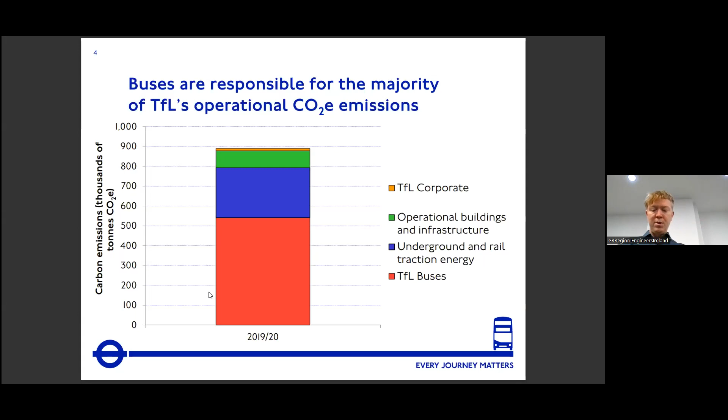This is a chart that a colleague of mine pulled together that I find really useful for answering one of those questions I used to always get at conferences when presenting about us going to electric buses. People would say, oh, you'll use more CO2 in the production, making those vehicles and batteries, so it's a waste of time - you might save CO2 when you're driving, but you will create more CO2. The thing is, the buses last, for us at least, 14 years, and then they have a life after that - they don't go to the scrapyard after 14 years. In the last 14 years in London, we will do one battery change during that time, which we've put into these figures.

So yes, battery electric buses have more embodied CO2 because of the energy-heavy manufacturing and sourcing of precious metals for the batteries. But the operational life of that vehicle is 14 years in London, 60,000 kilometers a year, and some buses will do 1 million kilometers. There's such a saving per kilometer in CO2 that it makes really good sense for us, even if the disposal impact is higher.

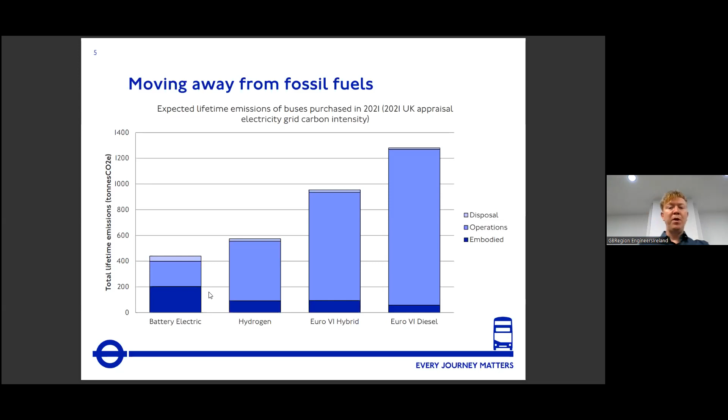And you can see it's the same for the diesel electric hybrids, not quite as good, but better. Hydrogen is something we're keeping a close eye on. It is more energy intensive to make hydrogen, but there are going to be much lower CO2 versions of hydrogen coming out soon. So those figures are based on the fuels currently available, but in future that may well be better.

So what we've done so far - each of these would have been a huge presentation themselves, but for the Euro 6 retrofit and for the hybrids, I'll just do one introduction slide and then focus on zero emission. The entire bus fleet was brought up to the Euro 6 emission standard for PM and NOx for air quality reasons. Only hybrid buses have been purchased - I think the mayor officially said 2015, but in reality, since around 2012, all the double decks we've been buying have been diesel electric hybrids. And then as of 2020, we've only been buying zero emission buses. So that's what we're doing now.

In a way, we've been buying the easier zero emission buses first, the ones that do shorter routes, etc. Soon every route in London will have to go zero emission. This target of when the entire fleet should be zero emission has changed a few times and is likely to change again. The mayor initially said 2037, then brought that forward to 2034, which we're definitely on target to meet. But 2030 has always been spoken about if we get funding to do it. In that case, we'll have to move a lot quicker and potentially do other things like retrofit existing vehicles into battery electric.

So this is the SCR - like I said, this would normally be an entire presentation itself, but I'll just quickly go over it. London had a real issue with NOx emissions, and it was the worst when the UK was in the EU. London was the worst in Europe in terms of nitrogen dioxide emissions in the centre. When we tested the first Euro 6 bus in 2014, we could see it was an order of magnitude better than the Euro 4 and 5 buses before.

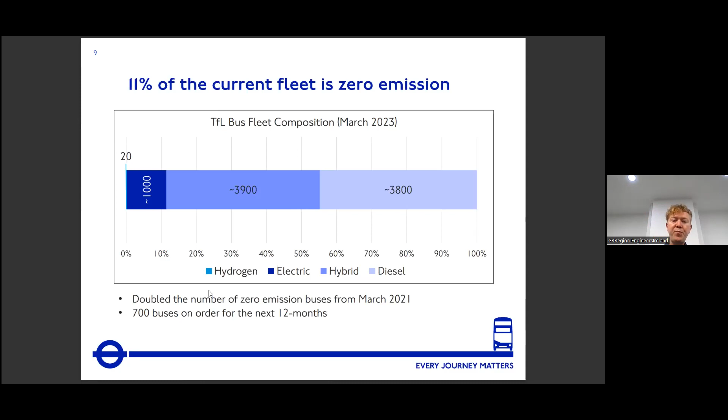Also the single deck buses were much cheaper, but the hybrid was an additional 100 grand anyway, so the cost benefit wasn't as good. So we kept those as standard diesels. But that proportion - all those diesel, electric hybrids and diesel vehicles - are now what we're transitioning to zero emission. And we've got another 700 zero emission buses on order in the next 12 months.

So this is the size of the challenge. I mentioned 8,700 buses - I think we started this before a lot of other cities, but when I go to Wrightbus in Ballymena, where a lot of our buses are made that end up in service in London, I see them all with, you know, TransLink and Dublin Bus etc. going down, because a lot of people have started later.

We don't have - in China, they charge it, a lot of them charge at 40 kilowatts, and they can charge for 10 hours or something like that. And that's nice slow charge, not too hard on the grid. They'll go out the next morning full, spend 8 to 10 hours out there, come back and then charge again. That's just not going to work in London. We need to do higher power charging.

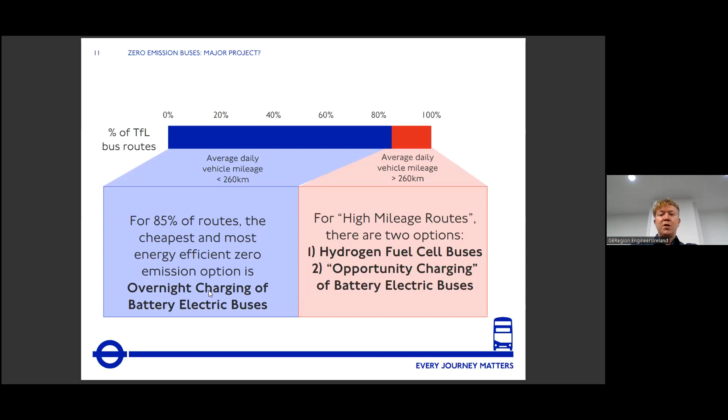But I'll come onto it a bit later. The cost of that infrastructure, getting it in London, is much higher than they predicted, and much more difficult to do. TfL probably aren't the cheapest for construction either, with all our standards etc. And certainly from our current pantograph project, we have a lot of additional requirements on the suppliers that drives the cost up, for safety and other good reasons. So we probably won't - I think that 15% McKinsey quoted will be closer to 5%, but I'll come onto that a bit later.

So here we are with our competing zero emission buses. The standard big battery bus is actually now cheaper than a hybrid bus, which is really surprising. The reason for that is the leasing companies now think this is the future. If we try to buy a new hybrid bus now - which we haven't done, but we sometimes get the prices for them - it would cost us more than buying a full electric bus, because they know the full electric bus will have another second life after the 7 years, or even have a second life going outside London with a new battery pack in it later. So that's very cost effective now - you'd think transitioning to full zero emission would cost loads more, but in actual fact the vehicles are now cheaper to lease.

The big downside with these is the range is limited. Currently that double deck bus you can see there has about 500 kilowatt hours of battery, but the packaging constraints in it are quite tight - even at the back of the bus, I would struggle sitting down in there. It's just constrained. Also in winter, our range is limited - you can spend as much energy heating the bus as you do moving it around. So that's a real issue. We've had buses not managing to service in the harsh periods during winter because of that. So definitely a downside to those.

Charge time you certainly need to take into consideration. A lot of the buses run for 24 hours, so you need to find a time where you can charge them. It's around - some of them down to 3 hours, some of them 5 hours - depends on the size of the battery, the voltage, and manufacturer of it. The range is around 200 kilometers, but it is getting better.

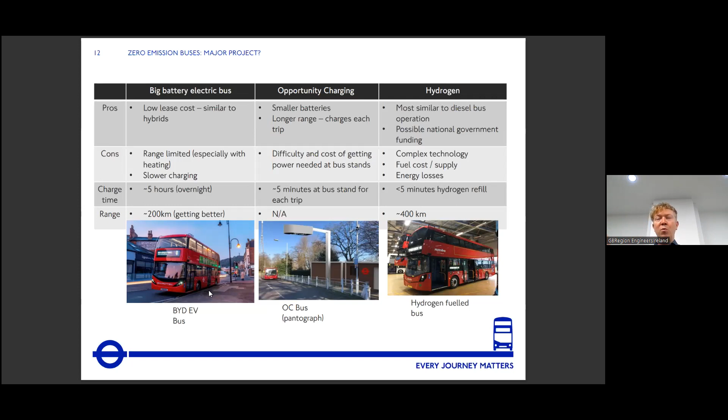So on current interventions, I'll spend a little time on this because we have a trial - I mentioned if we're forced to bring the zero emission deadline forward for all our buses, say to 2030, we mightn't be able to get rid of the existing buses quick enough. So one option is to retrofit some of our existing hybrid buses to full electric.

I'll talk a little more about opportunity charging and hydrogen, even though I've covered them a bit now. And then I'll talk about our new HVAC specification, because heat and cooling for these buses - we're going to have to be a lot cleverer about than how we've done it in the past.

All right, so here's a schematic. Someone's put a V8 engine in there, and we definitely don't have that - they're all 4 or 6 cylinder in the bus fleet - but this is a schematic of all our series hybrids. Basically, the engine drives a generator, which charges the battery, which drives the vehicle electrically. So the vast majority of the hybrids, including all the new Routemasters and the Alexander Dennis double deck buses you'll see, will be that kind of layout.

We do have a few parallel hybrids that are different. So one thing you could do is take out that engine and generator, put in more battery storage, and you have a lot of the drive axle and powertrain already to go there. So the theory is that shouldn't be too difficult to switch over - it should be easier than converting a normal mechanically driven standard diesel bus.

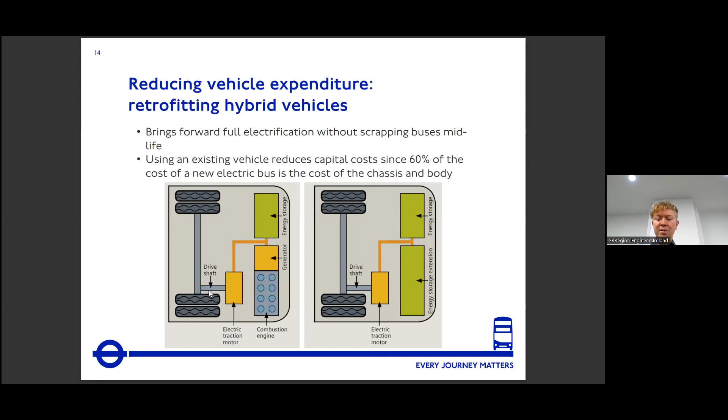And here is a layout. This is a new layout of the new Routemaster below. I wonder if I move this.

Yeah, I can see. So you can see underneath the stairs is the fuel tank, and there's some compressors there as well behind the driver. That's the ramp cassette there.

This is the battery pack currently on the new Routemaster buses. I think it's about 50 kilowatt hours, so it can do 10 kilometers easy enough in full electric mode. And that's the diesel engine, generator, and coolant pack there that's in the back, which is under the stairs of the new Routemaster bus.

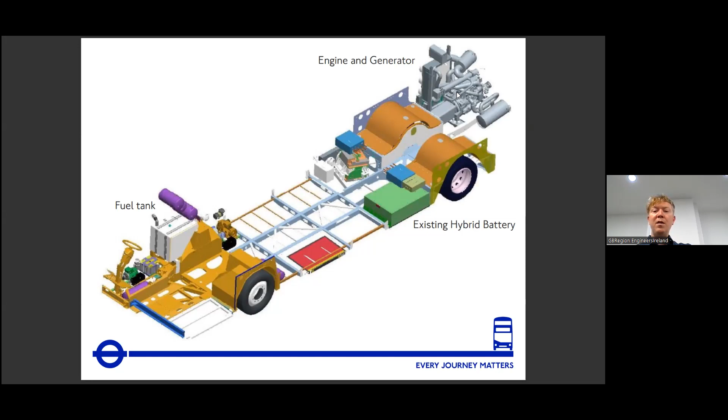And then we have a company, Equipmake, who've taken that whole engine, after-treatment, and coolant pack out of there and put in some batteries. These come from Nissan Leaf. Some more of them in front of the rear wheels, and some more batteries installed where the fuel tank would have been.

And they can get 400 kilowatt hours of battery packs in there and get what they're predicting to be a 200 kilometer range. We're keeping an eye on that to see if those figures end up being reality. So that's in service now on the trial, as a trial period.

It's had to get a new front axle put on because it exceeded the weight limit of the previous vehicle type approval. For this to roll out much further, my preference would be, and I've already spoken to the Vehicle Certification Agency and the Driver and Vehicle Standards Agency, is a lot of companies are doing this, and they're doing it for cars as well.

The danger is new vehicles have to go through a full type approval. You don't want someone to just not go through all that arduous procedure when they're doing a retrofit. So ideally, before this goes much further, there should be some sort of national type approval scheme, just to make sure all the safety stuff's done, that people have looked at. Weight distribution is not affected, steering and braking systems are still fine, all that kind of thing.

So that has the potential to be used, and probably used a lot outside London, where the buses don't have as... typically we have the buses for 14 years. Other cities might decide if they're going to invest all of that money, they'll want them for longer than that.

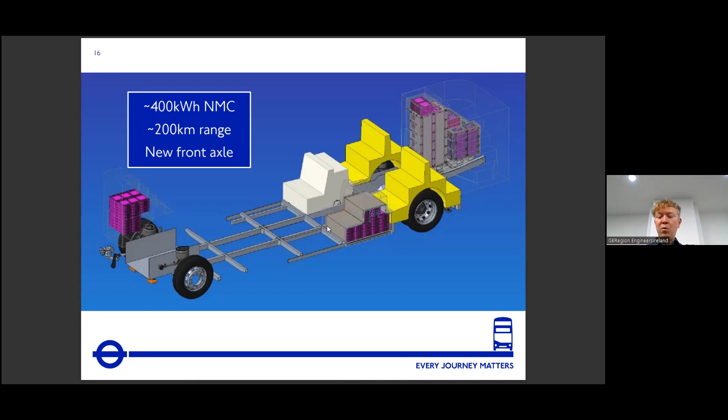Then our opportunity charging I've mentioned. So this is low power in the garage, high power when you're out on the route. And the idea of it is the buses spend time at a stand anyhow. So when they finish the route, they sit there on the stand and then start the route again.

You can charge at that stand, and we've done some analysis where if we charge at 450 kilowatts, all the bus routes would have enough time within the current stand time they have to take on enough energy to go back and run to the other charger. So that's one reason we're pushing for the very high rates, because that 450 kilowatts seems to be the sweet spot for us.

So 450 kilowatts, if you charge at that for 6 minutes, so 1/10 of that, you get 45 kilowatt hours, and that's enough, at a kilowatt hour per kilometer, to do 45 kilometers. But with heating and hills and all sorts of other things, quite often that isn't there, so you need to build some resilience into that.

But that's the idea. This pantograph, this is a Spanish company, Irizar. We really forced them to switch over to this standard because they had the pantograph on the bus, like you'd have on a train going up to the infrastructure. We wanted the pantograph on the infrastructure because we wanted to be able to charge double decks as well.

So this is now the OppCharge standard, pantograph on the infrastructure, coming down to 2 rails in the bus. The bus pulls up there.

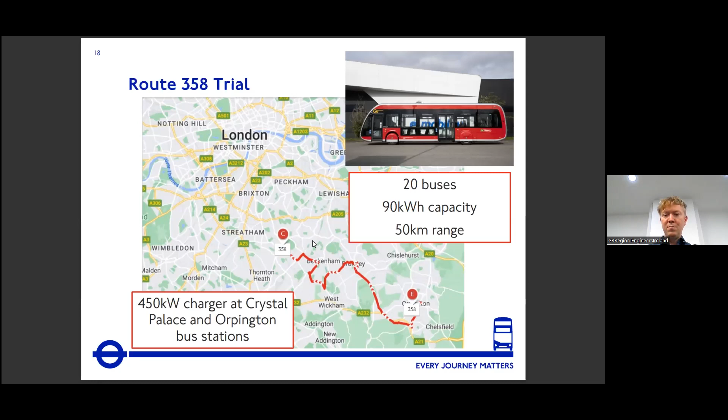And then I think this is one of the last slides. This is the project we have in Perivale. So this is a dedicated refueling facility put in an existing bus garage. The trial we had before, we built a dedicated facility in Lea Interchange and had a completely separate maintenance facility in a huge exclusion zone, and a full separate hydrogen facility operating. Now we've integrated hydrogen bus servicing and refueling into an existing bus garage that also operates diesel and hybrid buses in there. Nearly all the maintenance of the hydrogen buses will happen inside in the shared maintenance facility. The only thing that'll be done outside is if we have to vent any hydrogen gas, that'll happen outside.

This is now a fast refueling facility. So the bus and the refueling facility communicate with each other. If you want to fill hydrogen safely and you don't have that communication, you put it in at quite a low, relatively low pressure, because you don't want to exceed the pressure allowances of those fuel tanks. But if you've got loads of sensors on the vehicle and that's communicated to the refueling station, you can fill much quicker. And 10 minutes was a little bit long, and we prefer, because buses end up queuing up to get refilled, so we have this target now of 5 minutes.

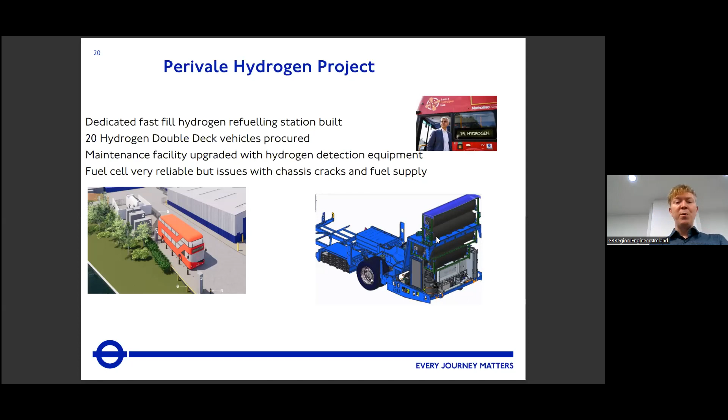Our main issue is getting the fuel. There's been a few days where we simply haven't had enough hydrogen to run the vehicles, and we've had to send out single and double deck diesel buses or diesel electric hybrid buses to replace them because there's not enough fuel. So if that's going to roll out wider, we would definitely have to solve those issues.

Lastly, let's talk about the new HVAC spec. Old diesel engine buses, whether diesel electric hybrid or diesel engine, have waste heat coming off the engine into the coolant package. It circulates around the whole bus and keeps you warm in the winter, not quite free energy, but energy that would otherwise be wasted. With electric buses, we don't have that anymore.

So lots of our vehicles, when it's very cold, have ended up using so much energy that they grind to a halt. I have to send one back to the garage to get charged and send another out to replace it. So we have to be a lot cleverer with our heating and cooling spec.

We've teamed up with University College London, who are doing lots of CFD analysis for us, and we're going to have a new heat pump only spec. We're not going to have any resistive heating elements, which are inefficient heaters. The heat pump will give us a nice coefficient of performance of 2 or 3, so you get more heat energy out than you put electrical energy in.

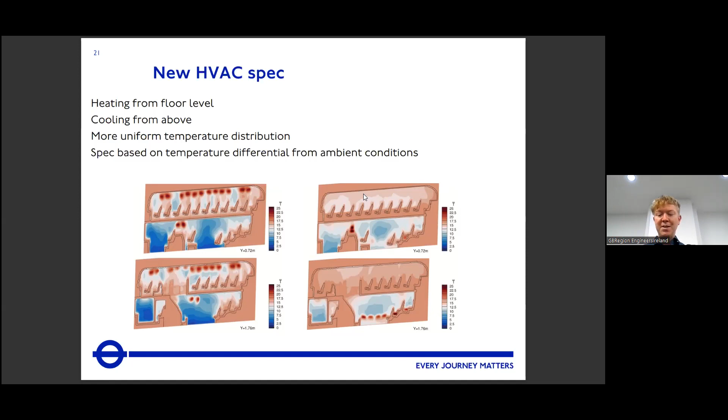And that's it. So yeah, there's a clear push from the mayor to introduce this. We've done the environmental analysis of the different technology types. There's a real clear political push from the mayor's office, and I expect, keep an eye out for announcements, but I expect something will be announced. Whether it'll be 2032 or 2030, I don't know, but I'd imagine we're going to be forced to do this a bit quicker.

And we've got, like we like to do, we're not just backing one option. We're keeping an eye on all of them. We're a big enough bus operator that we can trial things and keep them going. Hydrogen might be expensive, but we can get funding for it from Europe. Pantograph, subject to funding, we're trialing that too. We don't want to just commit to one path.

We're definitely going down this path because these technologies develop at different rates. For all we know, there'll be a step change in batteries that makes them a complete no-brainer, and the other things aren't needed, or the hydrogen economy could completely change, and then it makes sense for that. So we have these things trialed now, and I think it's easier for us to roll them out if those situations change. We're not putting all our eggs in one basket, basically.